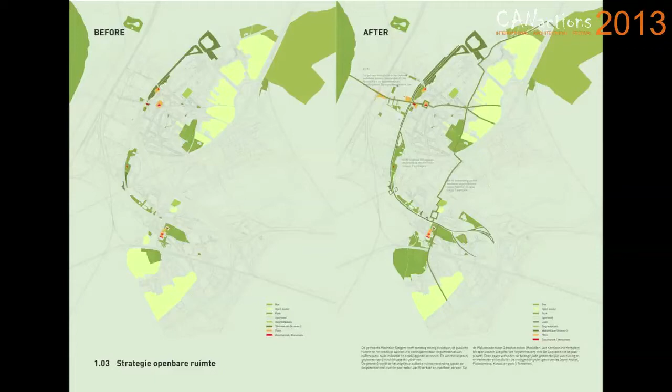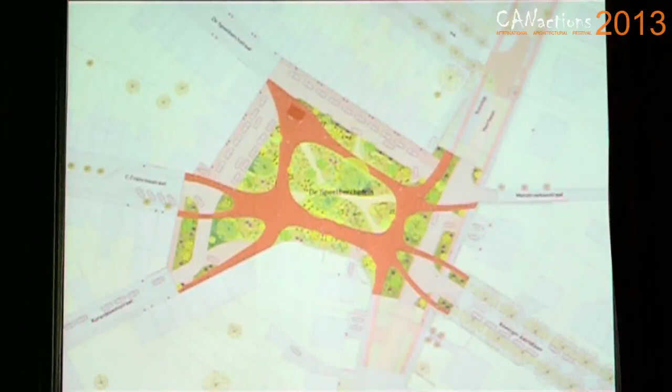But by doing this research ahead of time, we could clearly prioritize the residential walk paths, with green spaces in between, creating environments that feel like this: much more wild nature, a nice recreational place to be.

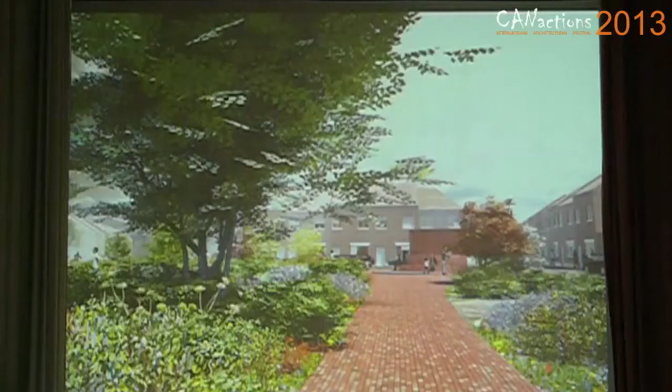Another reality we had to deal with was on site there was a small brick structure for electrical infrastructure. It's a small, incredibly ugly building that had to stay. But we took it as an opportunity. What if we took that idea of the brick building and made it part of our design? You can see here, in the distance, we turned it into a kind of brick icon. It looks like the brick of the path comes up into it, and you can see it here as well. We merged it into our language, and it helped us think about the brick paving pattern for the walkways.

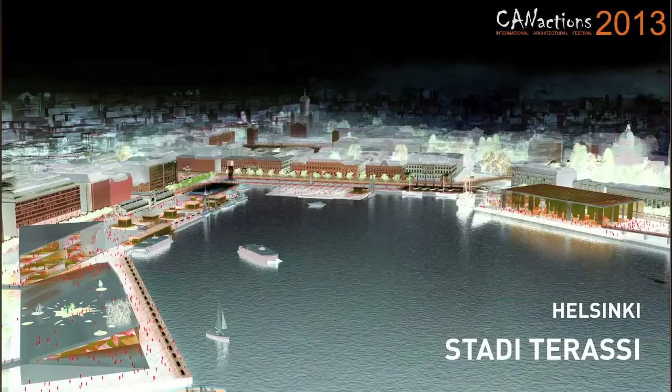Switching locations, even further north, Helsinki. The project is called Stadi Terassi, which means city terrace. It's a competition we won there.

If you know about Helsinki, it's very well situated on the water with a rich tradition in terms of its harbors, and the city is very much defined by them. The city center is here, and the site was this historic harbor. It was an ideas competition we took part in, and the question was what do we do with this area? It's historic, it's significant, it's an icon of the place, with many beautiful buildings around, historic churches.

But the shipping industry is fantastic because it brings a lot of people to the area, though it also has a lot of consequences. These tourist boats, cruise ships, have a lot of security realities—they need fences, they need a lot of parking space. So the impact on public space is incredible. The amount of space where people can actually get close to the water is extremely limited.

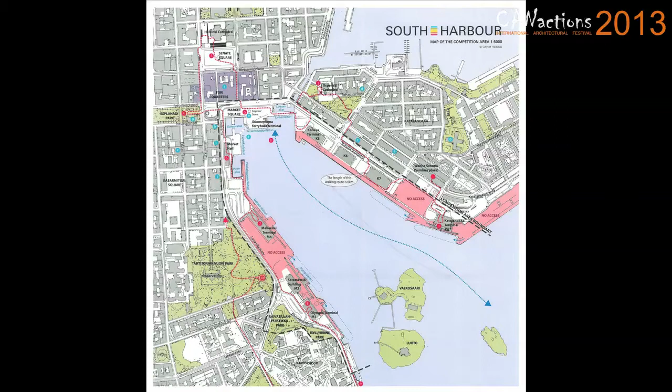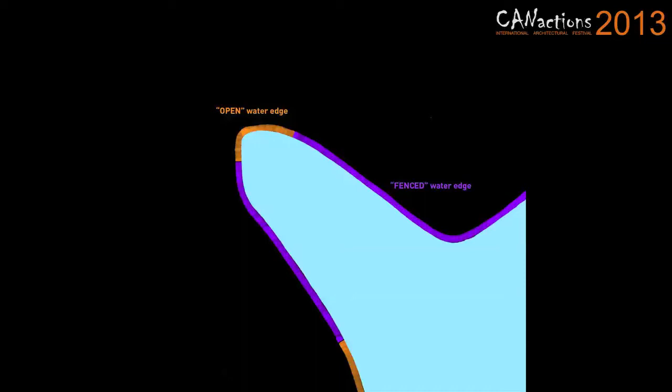To summarize, in this incredibly large space the purple represents the amount of waterfront that's fenced off, where citizens can't get to the water, and the small patch represents where people can actually get close to the water. So this is inherently something we wanted to change.

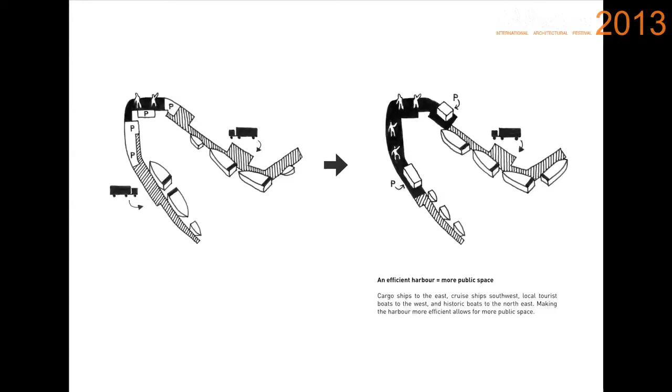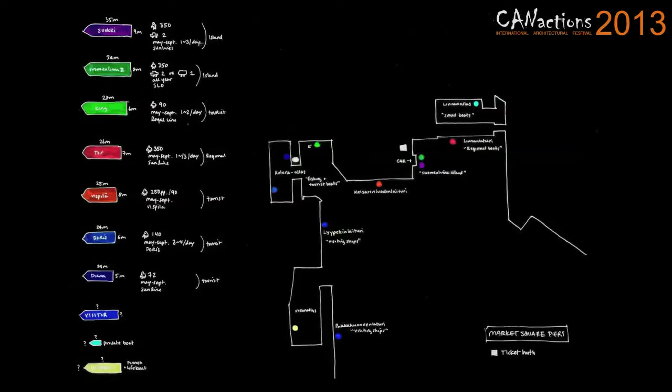But of course, to do that, to just say I want more public space, requires really understanding the shipping industry. Sure, let's increase the public space, get rid of the parking, and give less space for these boats. But that requires understanding the 700 different levels of the shipping industry, the realities of the trucks that deliver them, their docking realities, where they want to be, their requirements, their loading issues, and how trucks get to them through the city. All of this came before we did the pretty renderings I'll show at the end.

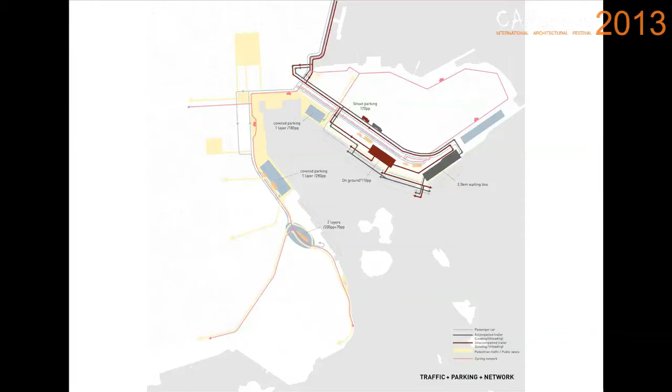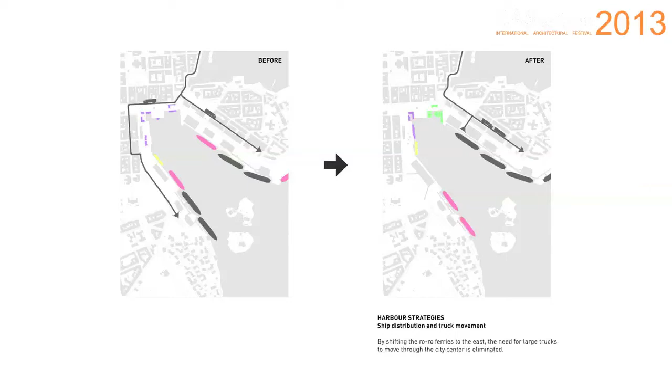But all of this allowed us to come to a few very simple principles. We could actually rearrange the way the boats work to be more clustered, more grouped, making it more efficient. We made it so large trucks no longer had to go through the city center. This allowed us to increase public open space, as I spoke about, and bring in more trees.

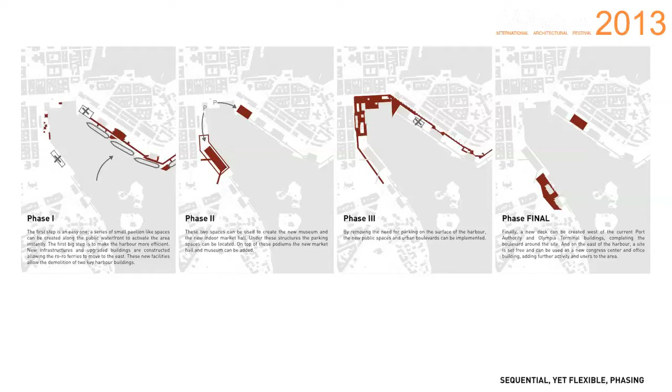It's also something that's going to happen over time. This is still a very active, very successful port—not one of these historical ports that's failing. This one is quite successful. So this is a long-term, maybe 50-year strategy of how the port can pull back and allow space. We also need to understand how the phasing of that can work in time. This is expensive, what we're suggesting.

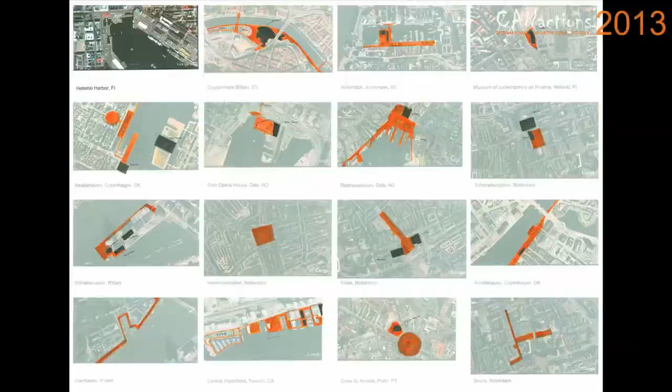We studied a lot of other public spaces around the world to get a better understanding, because this is a lot of public space we're talking about. It became about, if you're going to add this much public space, you have to think about the kind of activities you want to have there. How do you program it? What do people do there? So that became a key part of it. What all do we put in? How do we make the space diverse and flexible, but still have many events?

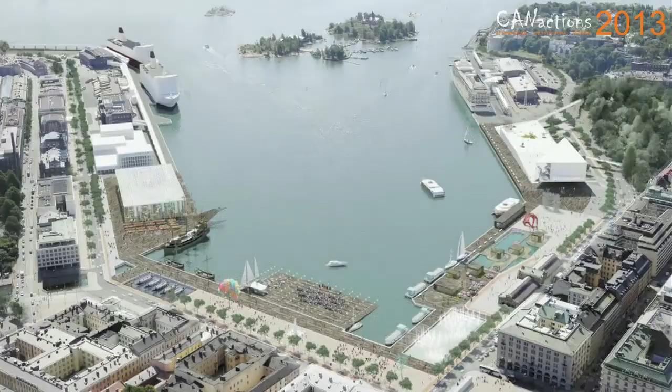Here you can see the changed state. Zooming in, this space is for a historic market which has been going on for hundreds of years, so it had to remain. It's beautiful, a classic market situation where you can have fruits and meat. But the reality is these markets often take up significant parking, and maybe it isn't the most nicely designed space in terms of how you react to the water.

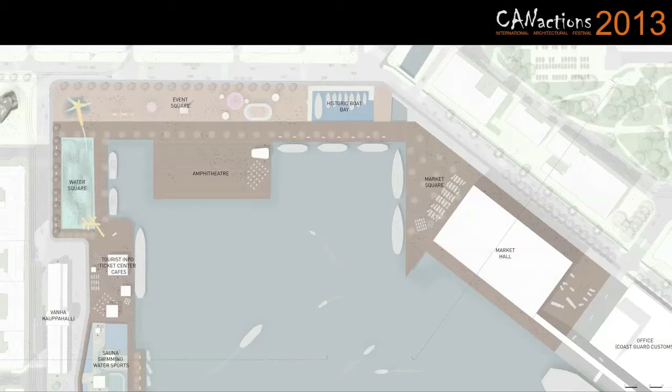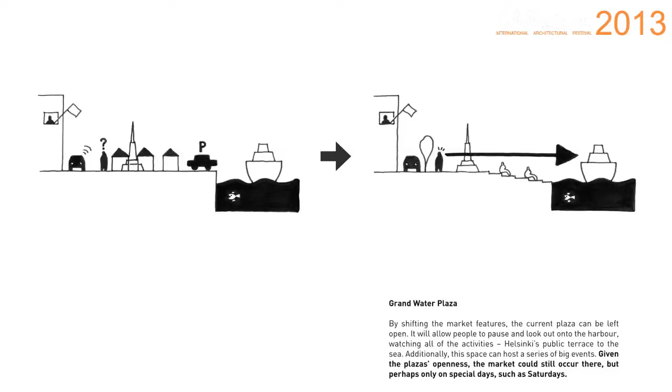So we wanted to change this space and make it more of an amphitheater towards the water, a place to sit, a nice dock, instead of being at the edge where you don't even realize where the water is. We gave it a slight slope down so you can see the water instead of just looking at cars. A city terrace, as we called the project.

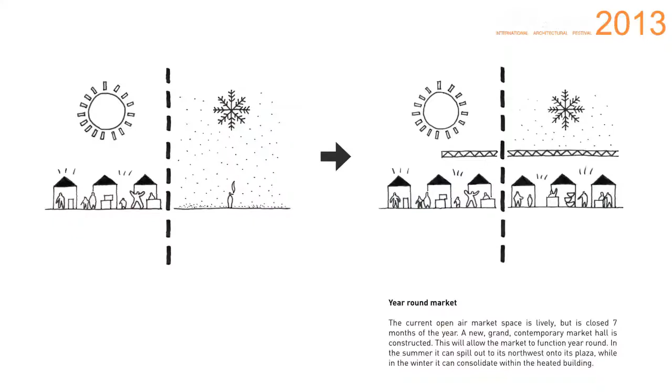Another absolute fact is, much like here, Finland is extremely cold in the winter, so for 6 months, if not 8 months of the year, the public space is basically unusable, so the market cannot function. So a pretty obvious solution: let's provide a structure where the market can have a market hall interior, shown here, that can also have interaction with the waterfront and a feeling of open space.

Additionally, on the other side of the park, at the time they were talking to the Guggenheim about potentially having a museum, or maybe not the Guggenheim, but another museum. So they were wondering where to place it. This was part of the question for the competition. There's a beautiful hill adjacent to the site, next to a very not-so-pleasant area.

It's a beautiful place to sit, maybe see the water, but again, you can't touch the water. It's cut off by this roadway here. So the thought was pretty simple.

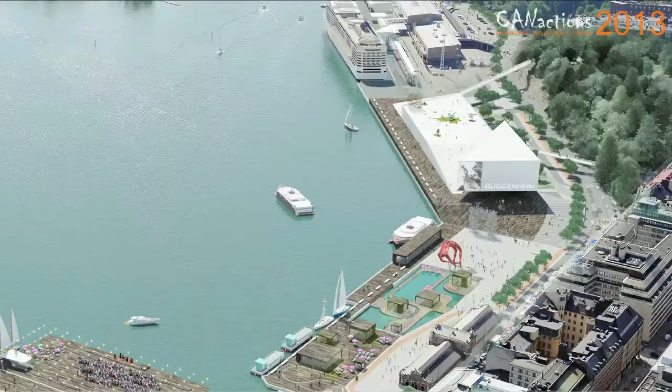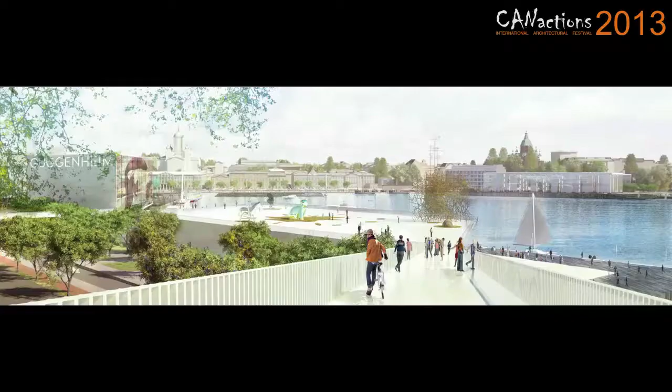We can just take this hill, which is already risen, and pull people directly off the hill straight towards the water, providing direct access to the top of the Guggenheim, maybe a sculpture park, and another large terrace onto the city with a better connection to the water, as you can see here, and a place for it to spill out. The entire composition, we think, adds up to a series of varied spaces that provides activity.

But again, the key part here was thinking about the gray before the green. How do we handle the infrastructure before we're thinking about where to put the Guggenheim?

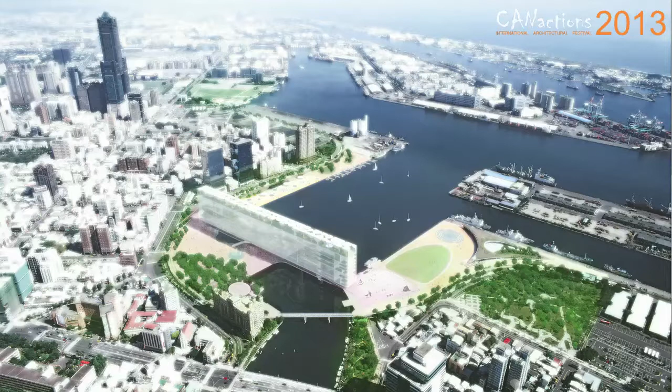Very simple idea. Architecture, of course, is many thoughts, many ideas. We didn't invent this, but a building in many ways can just be a showcase of the users themselves and not necessarily be about the architecture. So this is a project we proposed in Taiwan, another large harbor redevelopment. I can talk about all the site things we did, but I want to just talk about this briefly.

The general idea was this was supposed to be a new cultural center, a place where people could perform music, practice music, have concerts, art galleries. They had a ridiculously large program, which is also why we have a ridiculously large building.

But that's why we thought the beautiful thing about art or design is actually the process itself and the performance. An event like this is nice for you to come and listen to me talk, but for me, that's the least interesting part, hearing someone talk about design. It's more interesting to see the real process, especially musicians working or things like this.

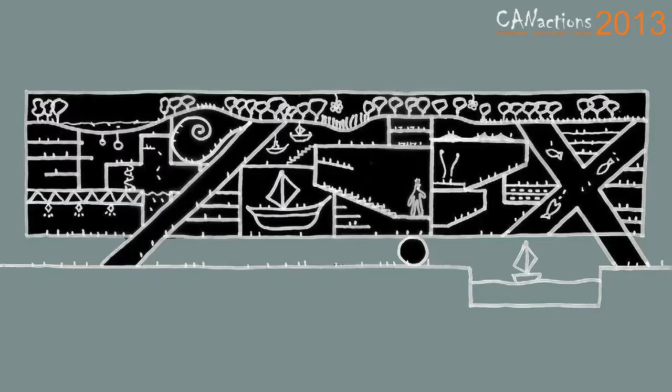So we wanted to treat the entire building as a showcase of what's going on inside, as you can see here with this sketch. Just the idea that the public, it could be a big billboard for the creative industry in Taiwan, which they were trying to showcase. So this was our driving factor.

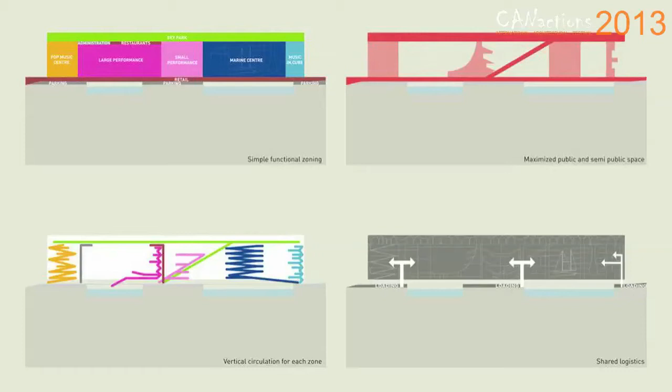But again, to do that, you need to be extremely strategic about where the elevator cores are, how to arrange the building, the structural systems, how you deal with the facade, because most concert halls do not like to get sun in them. They like to have other lights upon you. And then they could give this amazingly rich experience.

So when you are seeing a concert, you could imagine seeing a rock concert and then being able to see the city skyline in the background. We thought it would be possible to have a green garden on top for sustainability reasons, but obviously this could be a large gift back to the community to have a green space overlooking the city.

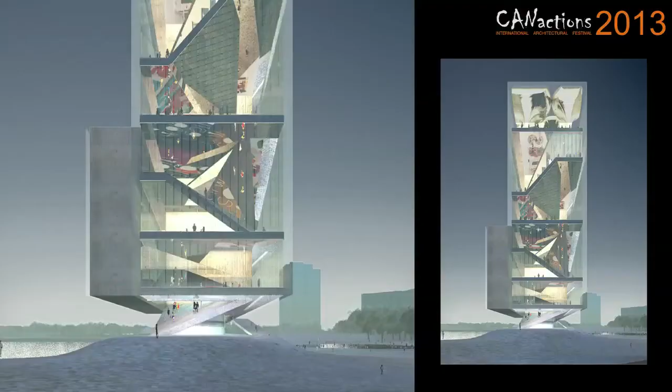Even just something as simple as the reality that you would need a staircase to move up through the museum. You could use the bottom side of the staircase to be basically a series of mirrors to create this dizzying facade where you could see actually inside the museum from the outside.

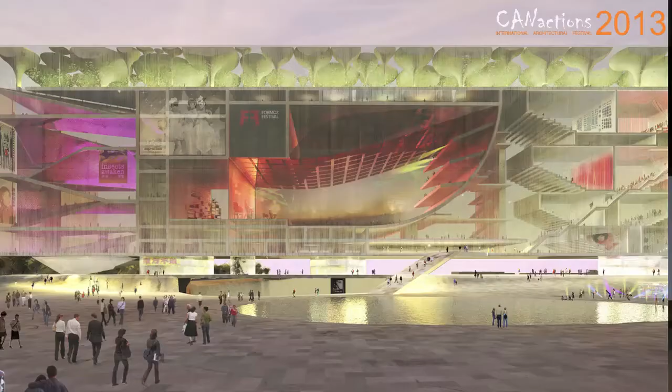And then from this main performance plaza that we created, that we thought people could just kind of play and do as they wish, we wanted to have this kind of informal performances be able to happen on the plaza and related immediately to the more formal things going on inside, this kind of almost direct, strange relationship between audience and performers.

House N, this is a house, a small villa, okay, not that small, in the Netherlands.

And they had a fairly nice house already in a nice traditional Dutch neighborhood with very nice, respectable old villas. So we wanted to bring something fresh because they didn't want to design a new building, but they wanted to do a renovation. So something fresh, yet still wanting to respect the character of the building as it exists, and especially respect the neighborhood, not try too hard to stand out as architects. We didn't need to make a purple building.

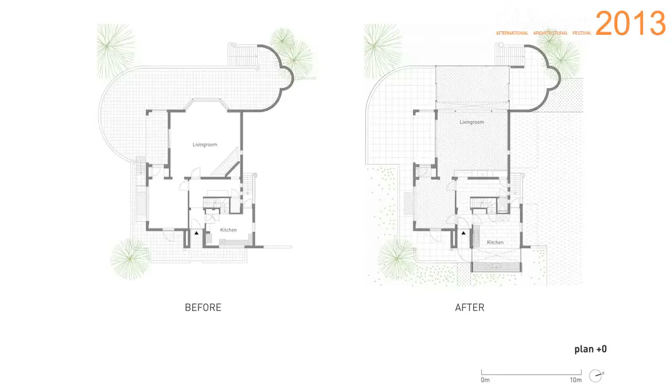But in a very simple way, this was also a bit about showcasing. You can see a bit in plan here, but it's easier to see in section. It became just about accentuating the living space, and really about three things: opening up a central space for the stairs, extending the living room out to the garden, and just extending the kitchen to make the kitchen feel like you're in the front yard.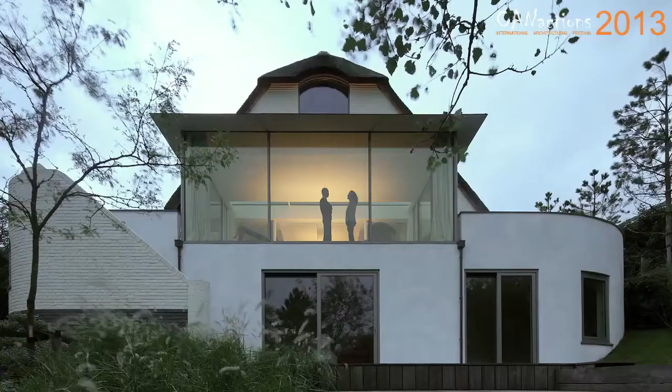And then you can start to see here, it just gives this much more natural relationship. Still respecting the old buildings, not trying too hard to stick out, but making it so when you're inside the building, you're not so sure if you're inside or outside, perhaps.

And then with the stair in the middle, because of the realities of being able to use a laser cutter to cut steel, the handrail, we could design in any way we wanted. So we wanted to take into account some structural realities, that it wanted to be denser at the bottom and maybe lighter at the top.

And two, we wanted to have fun with an old pattern. I mean, it's a bit of a traditional pattern. Well, it's definitely a traditional pattern. But we wanted to do something that wouldn't have been possible with that pattern in the past. And historic patterns, actually for the craftsman, it has to repeat. It can't have a warp to it. So we wanted this pattern, kind of as it went up, to start to do something it couldn't do before.

It gives this lightness and sense of tradition to the space, but then there's also this sense as you rise up that there's something more contemporary going on there as well.

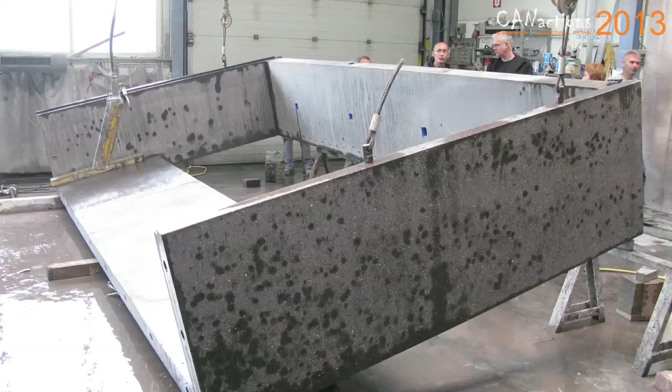And then for the kitchen, we wanted to do something that was massive. So we wanted it to be tied to the house and still respect the neighborhood, but we wanted something much more forceful, much more of its own object. So it didn't even necessarily need to be one house, but the kitchen in and of itself wanted to be an object. Plus it was just incredible to go to the factory and work with the concrete formakers who made this.

So with this simple piece, we formed the kitchen, looking out to the front yard, that makes it really feel like you're not necessarily inside your house. Maybe you're at a kitchen that's in your garden. Maybe you can just enjoy the sun a bit nicer than usual.

And it just sticks out, fits into the building. It's clearly a new addition, but it's not trying too hard to prove that we as architects did something new. And a nice place for the client.

Inefficient spaces can be extremely efficient. There always needs to be a place to hang out, a place to work, a place to do this and that, but sometimes a bit of leftover is the best thing you can do as an architect, to be efficient enough with the rest of the building so that you can allow for something more exciting to happen spatially.

Perforum, which is a mixture of performance and forum, was a competition we entered in Tallinn, Estonia. You can see here it's reasonably close to the center of the city.

In reality, it was a series of dance, art, a bunch of design things again. There was a music studio, an auditorium, a ballet school, and all of these schools were going to be glued together. So they all need their own facilities, they all have their own realities, they all have their own distinct needs. So how do we do that and still give them a sense of cohesion, because they used to be separate schools?

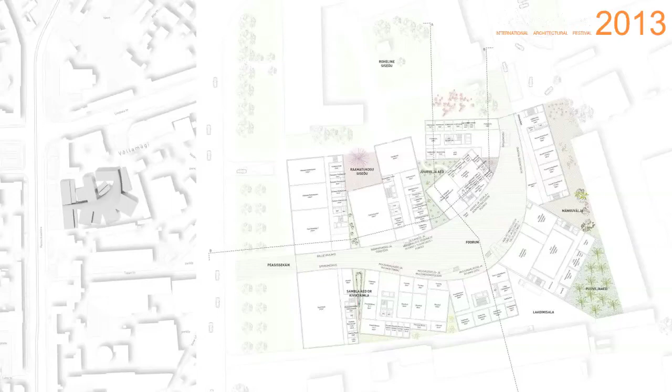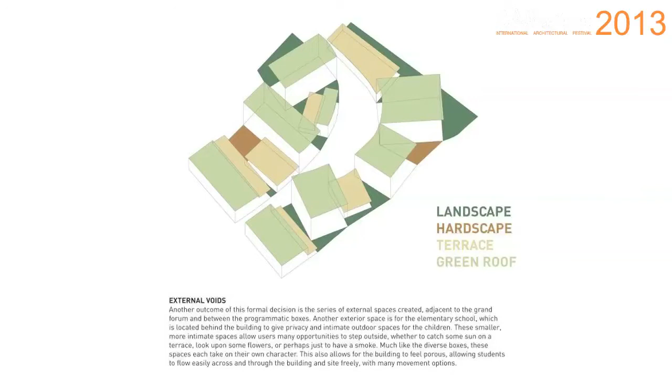And then we have to rearrange these spaces in terms of formal realities. This creates a series of also smaller spaces between the buildings, above the buildings, aside of the buildings. You can see in a space like this, adjacent to the library, a nice place to maybe go outside and read a book on some of the few times when it's nice weather in Tallinn.

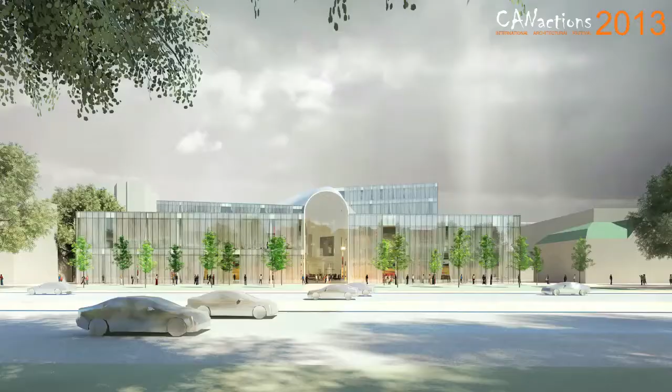And you can see here from the street there's a hint of the banana, as we chose to call it, spilling out onto the street with the spaces adjacent to it.

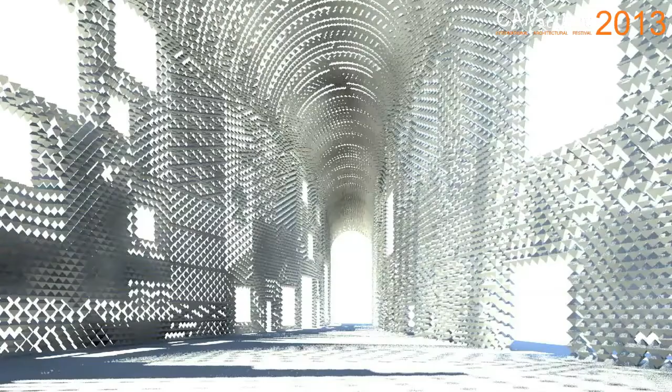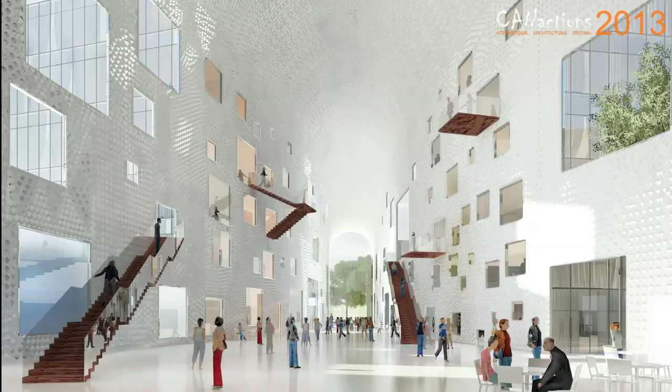But in the end, you could say the entire project was about this very inefficient space that we wanted like this. So here you can see what we dreamed of, what we got excited about: this big, long, almost classical archway space connecting the schools with windows onto other spaces, stairways that even intentionally protrude, stick out into the space. A nice place to hang out, maybe play an instrument, maybe dance, maybe just drink a coffee, something like this.

Okay, staying in Northern Europe, there's a lot of Northern Europe projects. Helsinki, Finland, another competition we did for Aalto University. Aalto University is a historic campus. The original campus was designed by Alvar Aalto, a very famous Finnish architect.

But the campus is old, while the university is new, because they are gluing a few universities together. So this new Aalto University says their motto is about technology, business, and design all being together.

But then the vision for this competition, the campus center, was the idea of urban life and design, was what they talked about. But we thought their vision was a bit incomplete, that really they needed the technology, the business, the design, the urban life, landscape, and a place to live all in this campus center, that the entire university should be represented in this new campus center that they were calling for.

And also in that diversity, we thought the landscapes should be represented. This is a campus on an extremely beautiful piece of land. When Alvar Aalto originally designed it, it was chosen because it's such a beautiful landscape. His buildings were placed because of the landscape.

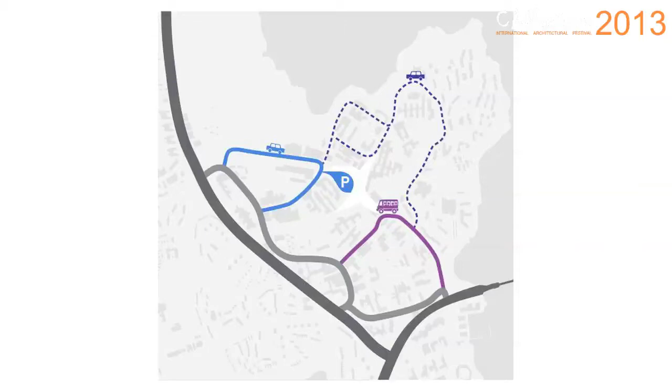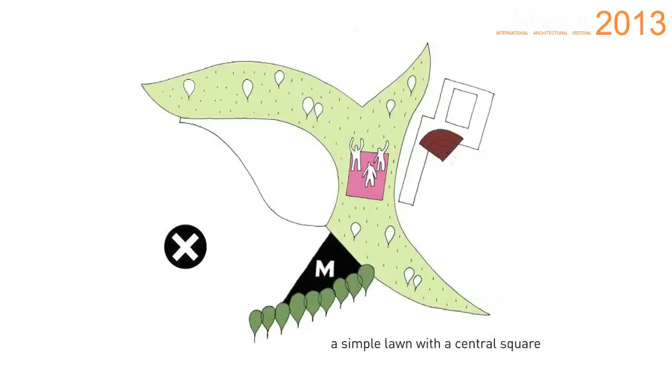But being smart about the parking allows us to pull some of these existing landscape typologies into our site here, in this weird kind of bent X shape. And in that space, the buildings can be representative of different people, but even the landscapes themselves can be representative of different places and different qualities.

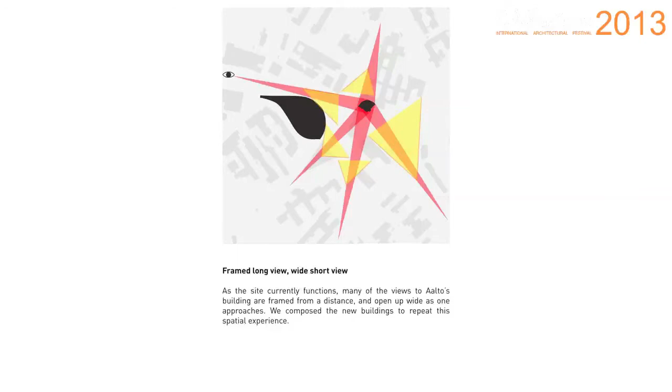We also had to protect long views. There's a lot of historic buildings there, about half designed by Aalto, so we wanted our building to be respectful, to still maintain the views of his historic, beautiful buildings. We wanted to add more varied program and a variety of green space, but we wanted it all to tie into the campus, as we hope it looks like here.

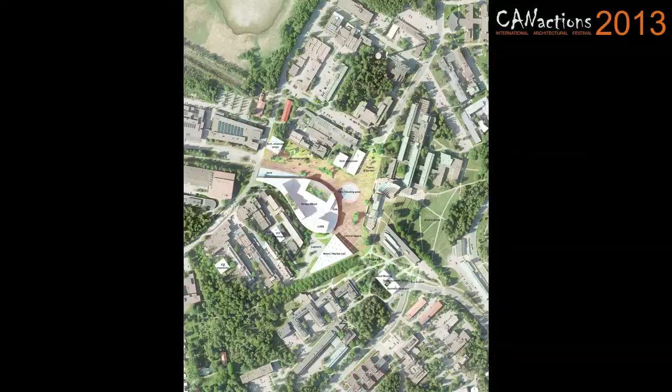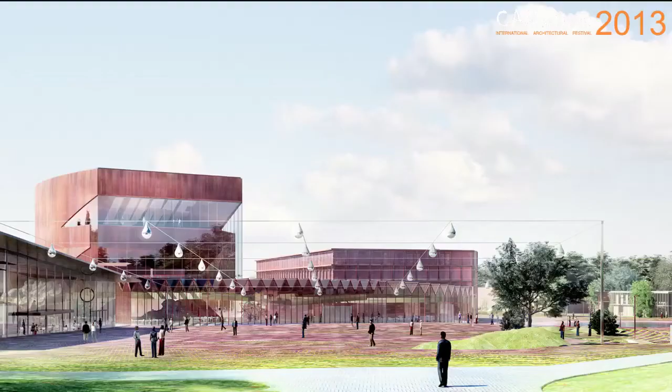You can see the visual quality from an aerial, and from the ground. One thing we wanted to do: the campus had a tradition of brick buildings. We thought brick was beautiful, but we thought we could use it on the ground surface instead. So that became the paving surface of the project we proposed, whereas the buildings themselves were not necessarily brick. This was actually a stained concrete and metal building, trying to match the color but use more contemporary materials.

Because Aalto, when he did it, chose brick because he thought it represented industrial. Now it's changed, as identity does change over time, and now people think it's about the brick. But actually what he believed in was industry and the mixing of industry and education. This was the key to our project, going back to the original vision for the campus.

But maybe the key part of the project was the design school. Another design school, I know. But this wasn't just a single design school, it was an architecture school as well as design, media, and film, and they had been together for a while. Of course, within that, you have different programs.

There's a need for classrooms, a place for professors to work, a place to eat and hang out and have a library, and there was the performance hall. We thought, how about we take all of those things inherent in all these programs and put them on the ground floor to create a really active base to hang out, one that's inside. This is Helsinki, extremely cold in the winter, so most times during school you want something protected.

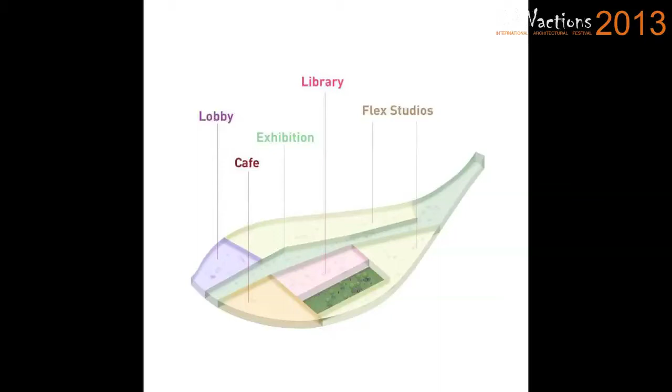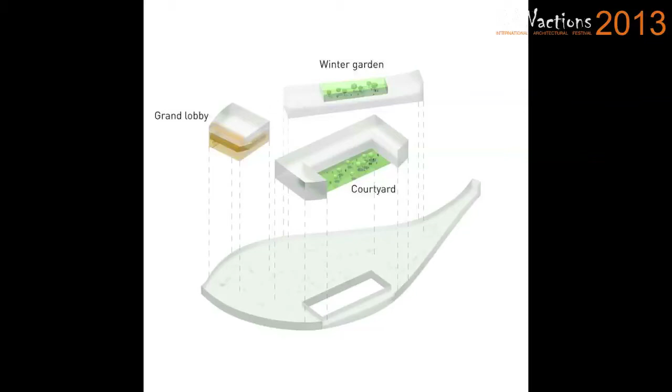You can see a bit of the programming here, creating a space to move through the middle of the site, with a library, some studio space, a place to eat, all on the ground floor, all connected, with more efficient buildings on top having their own kind of space and quality: a courtyard, a winter garden, a lobby. But forming one single gesture as we saw it.

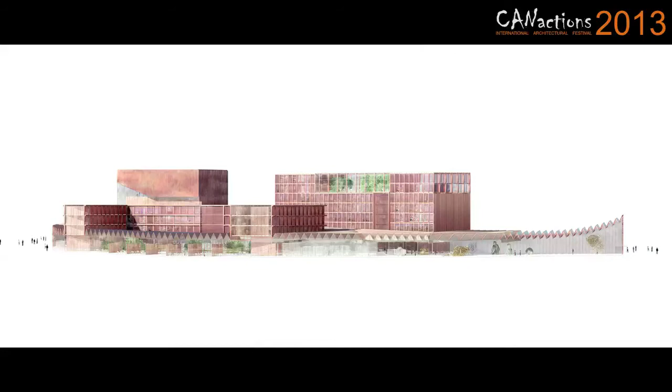Connected to the public space, the building can spill outside. You can see here from the main entryway, this is an extremely famous Aalto building that we wanted our building to direct us towards, while still allowing a large pane of glass so you can see into this creative hangout place.

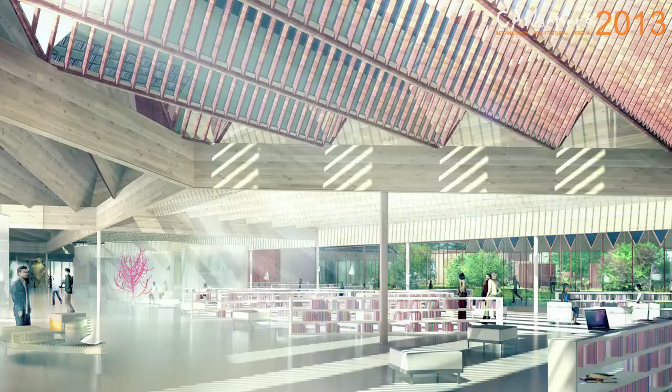And then a nice sun-filled space underneath this more industrial roof where you could go to the library, have a coffee, or perhaps do some work, to allow a few things to happen, but definitely a place to hang out. You can see how it fits into the campus in terms of the brick quality we spoke about.

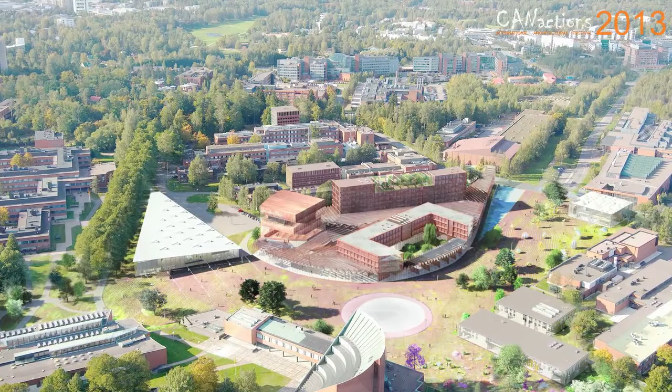Okay, so in architecture, everyone wants to talk about buildings, but the first thing you sometimes need to do is think about what is between the buildings. We were asked, this is Gelendzhik, Russia, on the Black Sea, by a Russian developer to come up with a vision for essentially a place for young Russians, roughly your age, to go on spring break, like American spring break, to go drink and party for a week when school is out. So a kind of fun commission to deal with.

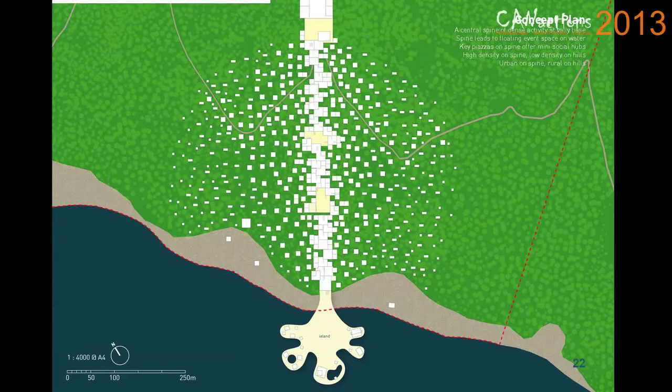And it has a visual quality like this - it looks like something we can all imagine doing with Photoshop, a very pixelated image, concentrated in the middle and starting to disperse on the edge, so that each student could have their option of how they wanted to stay.

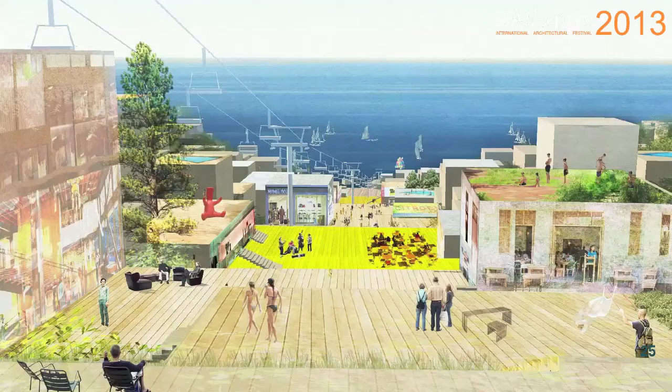And we even used the Odessa steps as a reference. We imagined a space like this, with a rope line connecting it, also to make it easier to move up and down the space, but a series of terrace spaces with bars, cafes, and restaurants spilling out onto some of these spaces, connecting up to the adjacent private dwellings.

And then also the key is how to think of this network, because also it's 20-year-old girls, and they're Russian, they're all gonna wear high heels.

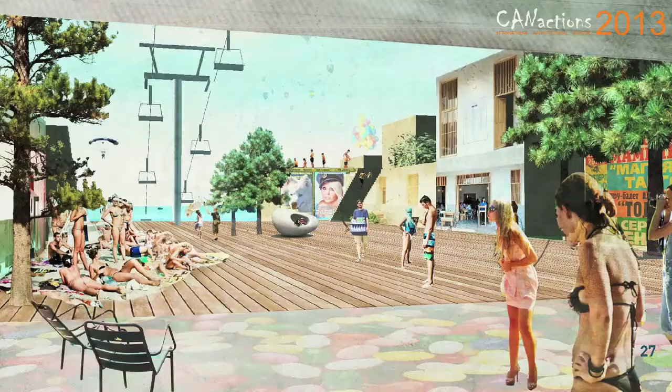So then you have to think about how to design stairs in an incredibly safe way. These girls should not be going up and down the hills. So it's thinking of how to form the stairs.

This network of stairs could even be slides, it could be more concrete paths, but it could have its own architectural quality in and of itself. The stairway itself actually becomes a stronger piece of architecture than the residential units themselves.

So it also makes it easy for the guy to bring beer back, or maybe vodka - that's a lot of vodka - but to bring that back to his house, so it makes it a very safe thing.

And also, I mean, all of this I'm saying a bit in fun, but also very natural in that the less you touch the ground, obviously, it's better for the nature. So the nature of the place could stay.

This is something that the Russian client didn't care about at all, but we were very concerned. This was an extremely beautiful site. To be honest, if you ask my real opinion, you shouldn't build there.

But we wanted the buildings to touch the ground as little as possible so that hopefully the nature could stay. And also so the buildings could stay, even though the Russian client wasn't so aware - if you cover all the ground, that's going to affect how the water drains. The earth is going to have a likeliness to move if something happens, especially in a rainfall. So this also was a key aspect of the project: how do we keep the nature that is there as much as possible?

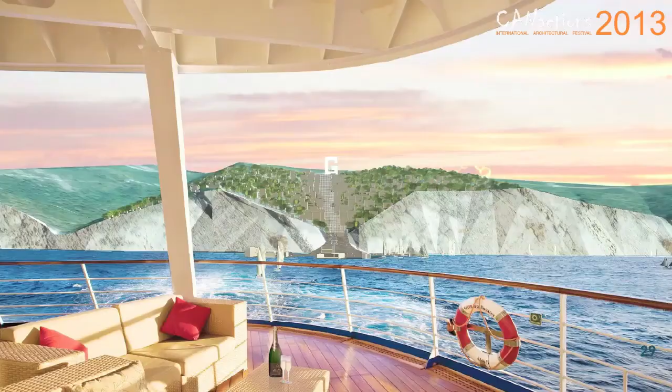And of course, a view from the Black Sea, which looks exciting.

It was a competition. They were asking for people to come up with ideas for what this space could be. It was one of the few spaces left because the city is growing. Tourism is popular there because Cyprus is absolutely beautiful and a great place to have a good time. But the city was growing, and the architectural tradition of the community was being taken away. A lot of people might want to come there and actually understand some of the local cultures and local events.

Some of the people who live there might still want to learn how to make a basket in a more traditional way, or how to grow some of the crops. So our idea was this idea of agriculture, so the culture of agriculture, we thought could be the idea of the center.

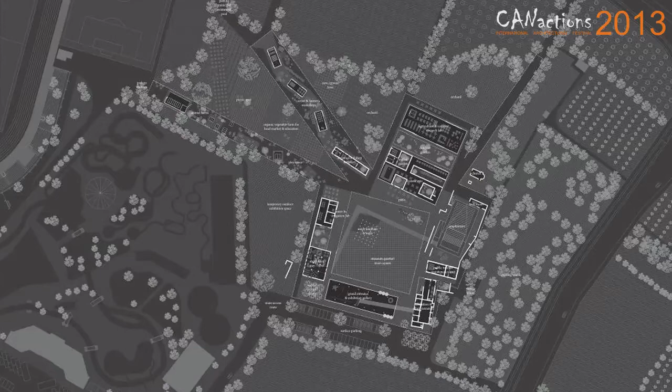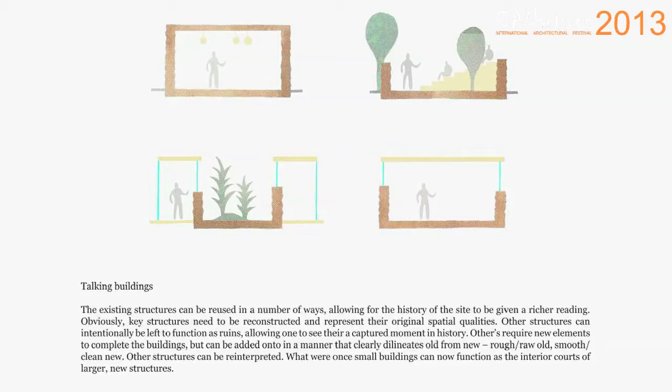In some way they trace the history, which we obviously value, but we wanted to play with that a bit. What you can see here in these diagrams is we thought there was an opportunity, since different buildings were in different states of quality, that in some cases we could actually use what was the historic building to make something outside. Sometimes it could be a standard enclosure, sometimes the building could just be used to make something completely outside, and of course we could use it to recreate a new structure.

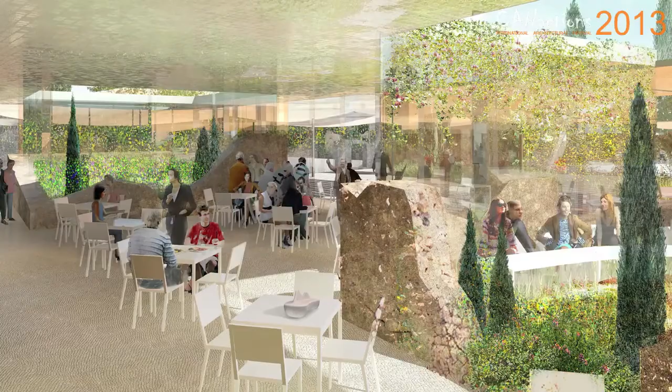So we wanted to make it - as you'll see in this image here, you can see it in the plans as well - there would be moments where you as a visitor wouldn't really be sure what was inside and what was outside before, to kind of mix up that spatial experience, to give something new. This is maybe the most important part of the project, I would argue.

When they called for this, they assumed it would be some kind of cultural center to draw people. And if you want to be really honest with yourself, the most efficient way possible to do that is do one big building, shove it all in there, build it all at once, and then you have it - it's very cheap. But because of the way we thought about the site, because of the way we thought it should be, we thought that was absolutely the wrong thing to do.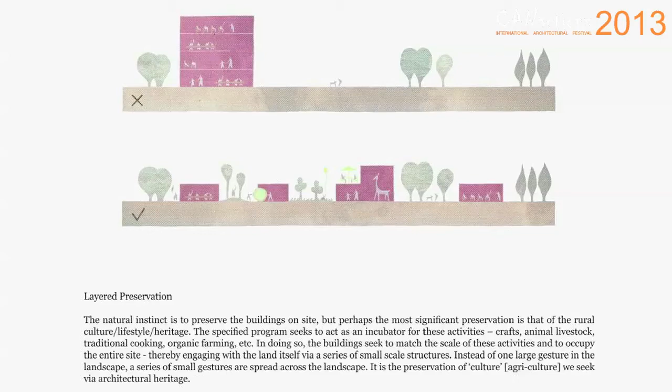So you can see our little black X there. We think this site has always been about nature, about relating to the land, and about much more of a smaller scale. So in our opinion, this was the right approach - a series of small buildings, much like the buildings that were there.

And another good trick we have, which looks cool in the renderings but is also really functional - the area was a former agricultural area, and in that area it was very traditional. At times you had to cover the agriculture with a fine net to protect the plants from the sun and some of the bugs. So we thought this net was a real opportunity, both visually as a beautiful piece of design, but in many ways super functional. The client can only pay for so much interior space - that's expensive, architecture is expensive. But a net is extremely cheap, and Cyprus has absolutely beautiful weather.

So just by simply covering it, protecting people from the sun, allowing the breezes to come through, you increase the square meters of the building, and you increase the amount of space you can have to hang out, and for the client to treat as program.

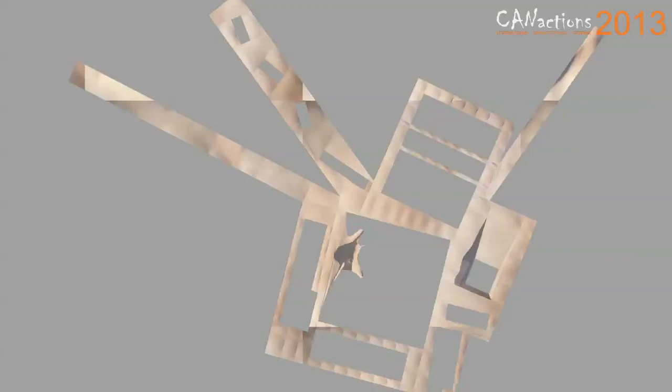You can see the net here. We spent a long time finding ones that didn't look terrible. You can see here kind of what it looked like with everything else removed in section.

I'll come back to the net in a bit, but I also want to talk about how we thought about programming. Again, it wasn't about programming buildings per se, it was about programming the spaces themselves. And that way of programming often was about thinking about the traditional agriculture there.

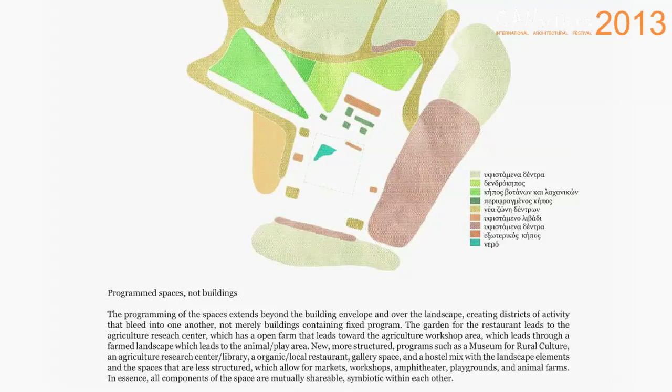So whether it was a building or not, there was an idea that you could think of how vegetables were grown in the area, how cooking was done. There was a place to eat, a place for performance, a historic church. Animals and children's play spaces were mixed. So this way of programming became less about building and about the space.

And where the buildings were just happened to be taken by what the space programming was, not the programming of the building. And it leads to a series of spaces like this. You can see it forms more traditional looking outdoor spaces, places for performance, a place to maybe show a video.

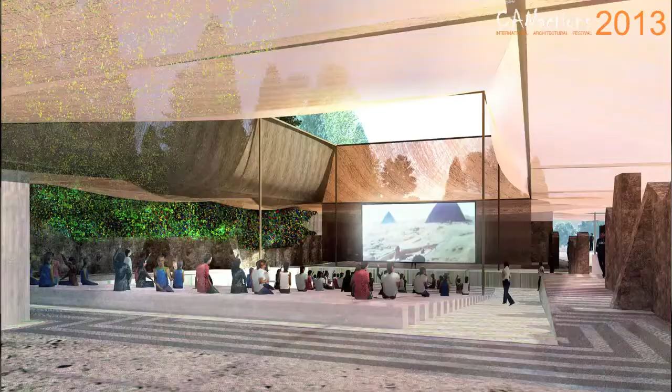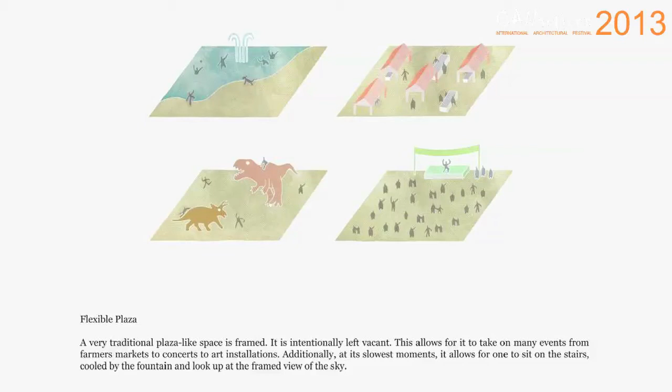And then also in the center was this, what is simply just a traditional square. We're not inventing anything here. Just a large open square that you could have a big performance, do something crazy, leave it blank, it could be just a fountain, but we intentionally left it open so that this could change, much like the spaces can change, this space can change daily.

So you can see how the landscape really comes in and has an opportunity to almost go under the net, and the net and the buildings become this kind of cohesive bit, but in some ways almost looks a bit like a collage or a mosaic, if you're in my study group this week.

Okay, on visually organized space. This starts to get a bit abstract here for a second and a bit futuristic, so tolerate me. But the idea of visually organized space, all of us take it for granted. Space has always had to be visually organized in some form.

When you walk down the street, you need to know there's a sidewalk, you need to know there's a curb, and you need to see there's a road. You always need to see it. The car needs to be able to see that that is for them, and this sidewalk is for me, the person walking. So space has always been visually defined. Same with the interiors of a building.

But you could argue that that is something we can start to question, which we have with some of our research we've been doing at the office. And in some ways, for me, this goes back actually really historical.

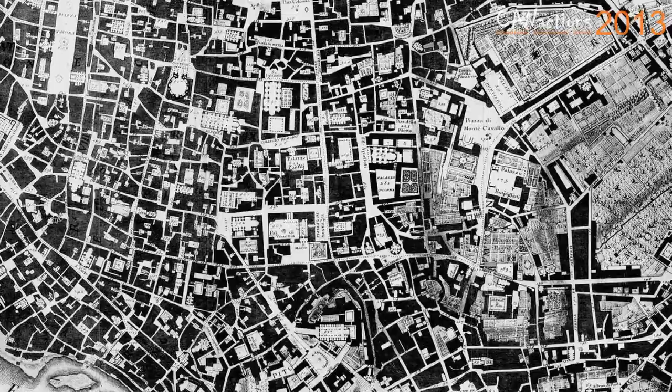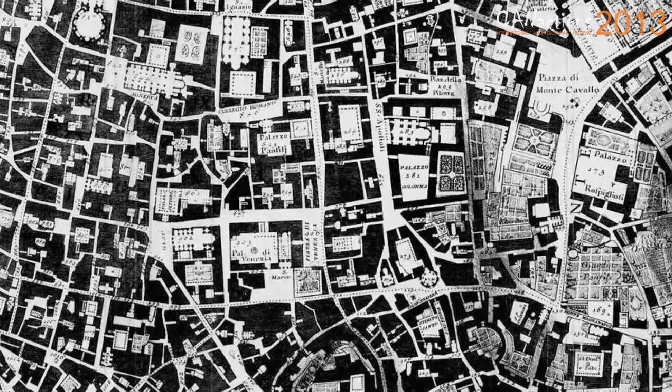This is a beautiful Nolli map. If you don't know what this is, find out. It's a beautiful old map of the city of Rome that doesn't draw a distinction between courtyards or street spaces and things like this. Everything is just either open space or kind of the foundation of buildings, shall we say. So it gets a lot more blurry.

And this is maybe what we can return to as technology starts to emerge, and something we can dream about. And also, again, relating to the work we've been doing this week for anyone taking part in the workshop, it also has to do with modernist space and how that can evolve.

So the first project exploring this was actually 10 years ago, called Chip City. And actually, Bjarke Ingels has since done a very nice project with it in collaboration with Audi.

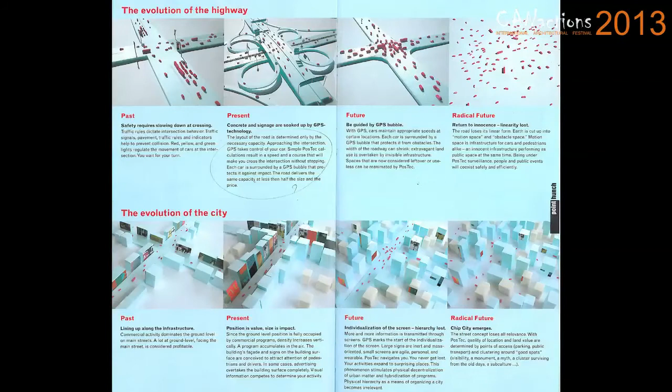But the idea was quite simple. With most of us having some kind of smartphone, iPhone, HTC, the idea that signage is maybe unnecessary. So when I drive along the freeway, I could look at the landscape more and the roadway signs less. Also makes it so in a place like Paris, I wouldn't have to be cluttered with 50 million signs telling me which way is the Louvre or which way is this or that. I could just enjoy Paris much more.

Also in the airport, I wouldn't have to be cluttered with large signs telling everyone where the flights are.

On another project that we explored in a very different way, we did this at the scale of the building, in collaboration with the Netherlands Architecture Institute and the National Library Institute. We looked at the future of the library.

If you know librarians, or people who like books, they're very scared. People don't know what to do with libraries. Much of us younger folks just do everything on the web, have no need to go to the library, so they wonder what the library will be. They asked us to help them think about it.

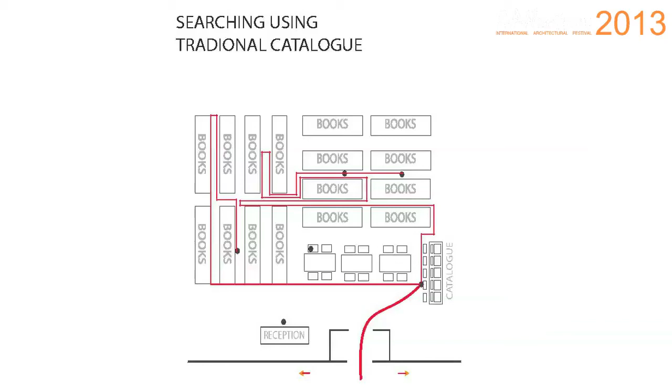Classically, for those of you who remember this experience, you had to walk in basically through a security gate, go to a catalog—which was paper when I was a child, now it's a computer—then you have to go down the aisles until you find the right space with this incredibly complex system that no one really understands, and then you find the book. But in the future, it maybe could be different.

Maybe you could just walk in, you don't have to worry about a security check, you find the book you like, maybe you see a friend outside, you go back out to see them, then maybe you go get your other book, and you continue kind of bouncing your way. It can be a much more free experience.

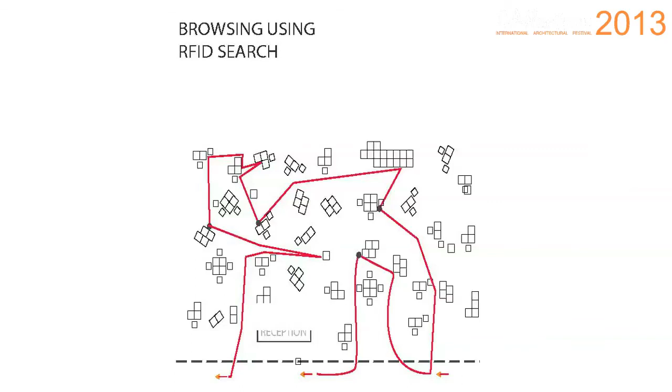But that doesn't necessarily mean it has to be total chaos. In reality, with what we're proposing, it can still be a very standard 90-degree layout. That's quite possible, no problem. But we think it allows the flexibility to do something a bit more free. This would require kind of a redesigning of the shelf as well.